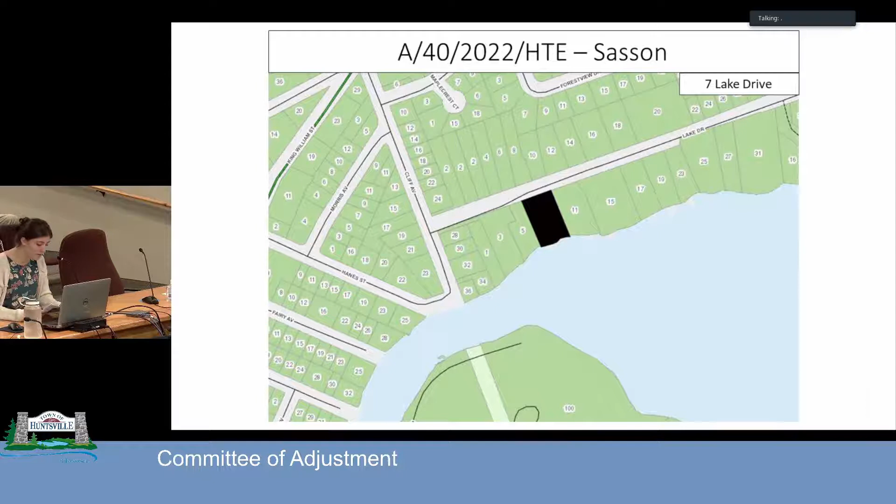Through you, Mr. Chair, the subject property is located at 7 Lake Drive. The lot is designated urban shoreline residential within the Huntsville settlement area in Huntsville's official plan and zoned residential 1 under Huntsville zoning. It should be noted that the Town of Huntsville's community planning permit bylaw was passed by council in July 2022, but is currently under appeal and not yet in full force and effect.

The subject lands are contained within the urban residential shoreline precinct in the CPP bylaw. The application is to permit the reconstruction of the existing dwelling and to expand an attached deck on the lot. The dwelling proposed to be reconstructed and expanded is considered a legal non-complying structure. The dwelling was constructed in 1976 with various alterations completed up until 2007, which included the construction of the deck, now proposed to be expanded.

The minor variance is required to recognize the location of the existing dwelling and attached deck, permit a 3-meter increase in height for a legal non-complying dwelling, and reduce the front yard setback from 30 meters to 13 meters for a deck addition and additional building height. The minor variance will be conditional on the owner revegetating the shoreline buffer, and this will be implemented through site plan control or a community planning permit to the satisfaction of the Town of Huntsville.

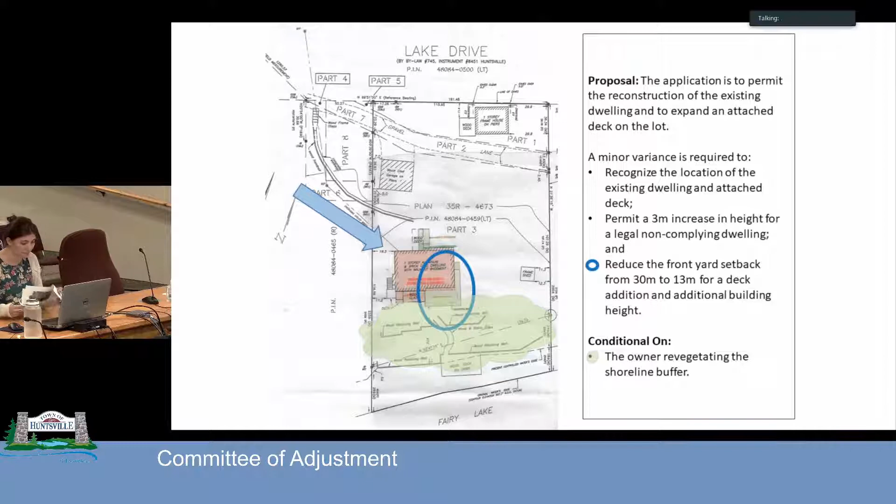Based on the configuration of the property, the proposed reconstruction of the dwelling and deck expansion is sited in the most suitable location. The proposal uses the existing foundation and remains within the maximum height requirement to add an additional story. The deck expansion uses the existing front yard setback and does not come closer to the shoreline.

The variance requested will not likely result in any significant impact to abutting landowners. Additionally, a condition has been added to revegetate along the shoreline, which will assist in providing additional vegetation and minimize the visual impact of the dwelling.

Having regard to the provisions in the community planning permit bylaw, this proposal would be in keeping with the identified precinct and policies contained in the CPP, provided revegetation of the shoreline is completed to the satisfaction of the town as a condition of the permit issuance.

Looking at the official plan, the proposed reconstruction has been designed to meet the character of the area by maintaining the existing location and staying within the maximum height. The reconstructed dwelling will be built on the existing foundation, and the deck expansion will not worsen the non-compliance, as the reconstructed dwelling will not be coming closer to the shoreline and will involve revegetating the shoreline.

Any impacts to water quality will be mitigated and a net improvement is gained. The reconstruction and expansion is also to be located in a clear, flat area, so adverse impacts on steep slopes and blasting will be avoided.

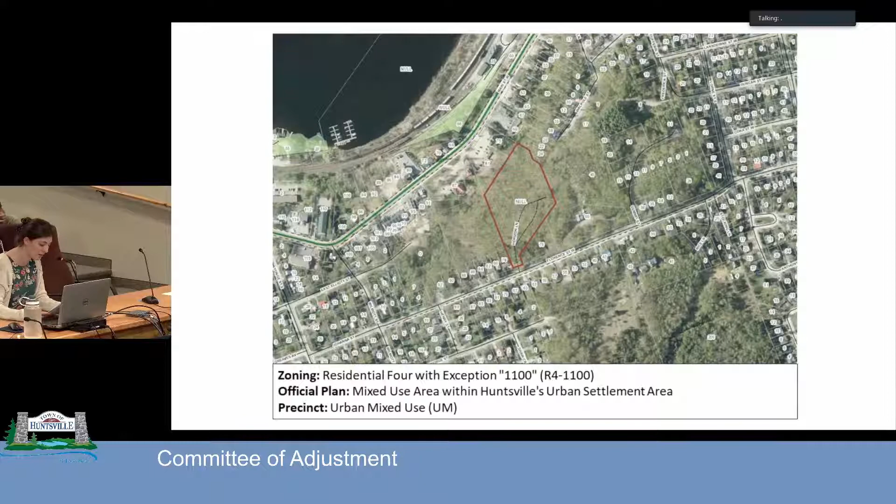The subject lands are contained within the urban mixed-use precinct in the CPP bylaw. The application is to permit the construction of a detached 2-story garage with 2 attached carports on the lot. A minor variance is required to reduce the easterly interior side yard setback from 6 meters to 3.2 meters for a 79-meter square 2-story building consisting of a ground-story garage with residential dwelling unit above, and reduce the easterly interior side yard setback from 6 meters to 3.8 meters for 2 144-meter square carport structures only. The minor variance is conditional on maintaining a 2-meter wide vegetative buffer along the easterly side lot lines to be implemented through site plan control or community planning permit to the satisfaction of the Town of Huntsville.

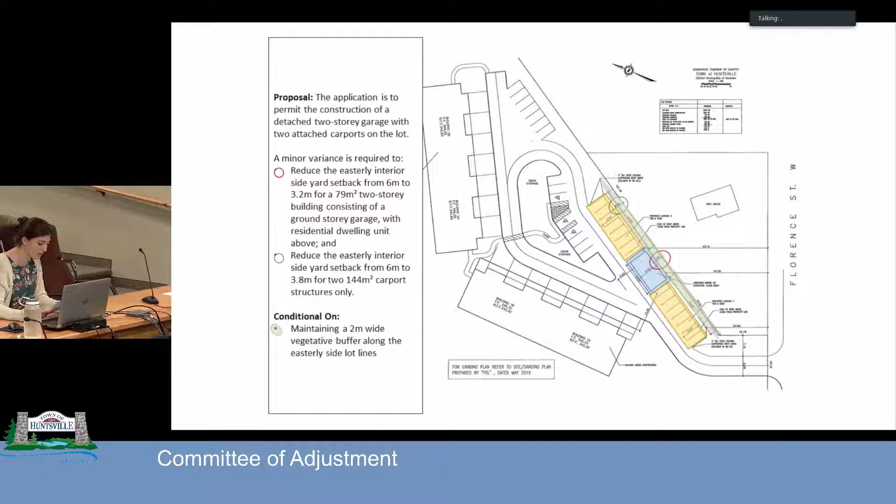On June 25th, 2001, a site plan agreement was approved to permit a townhouse development on the subject lands consisting of 16 2-story townhouse dwelling units with basement secondary residential dwelling units in each. A site plan agreement amendment application will be required should this application be viewed favorably by committee. The proposed use is in keeping with the site-specific permissions, and the development appears to generally meet all of the relevant provisions of the zoning bylaw. With the residential unit on the 2nd story of the garage, the site will contain 33 units overall and accommodate sheltered parking for all units.

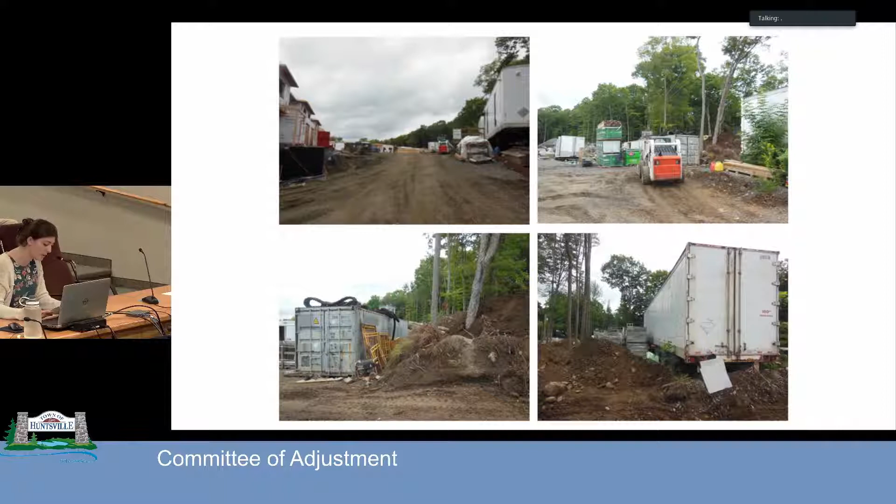The proposal is sited in the most suitable location, given the location of the entrance to the site and the current site layout. Additionally, maintaining a 2-meter wide vegetative buffer along the easterly interior side yard has been added as a condition to provide additional screening. If the CPP bylaw was in effect, a Class 3 permit would be required to authorize this development, as the proposed setback variation for the two-story garage is greater than 20%. Having regard to the CPP bylaw, the recommendations outlined in this report are in keeping with the identified precinct and policies contained within the CPP.

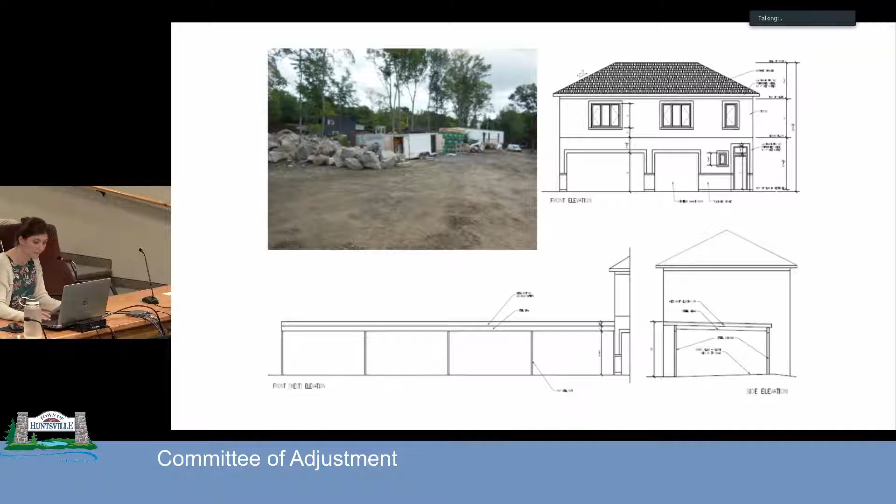Looking at the official plan, the mixed-use area designation encourages development that will contribute to the well-being and cohesiveness of the community in a compact form. In this instance, the proposed garage and carport structures contribute to the functionality of the development on the lot while being compact and cohesive with the existing site characteristics. The application was circulated in accordance with the provisions of the Planning Act, and the application would appear to conform to the intent of the official plan and be consistent with the provincial policy statement. Additionally, the application appears to satisfy the 4 tests for a minor variance as set out in the Planning Act, and therefore staff are recommending approval. Thank you for listening, and I'd be happy to answer any questions.

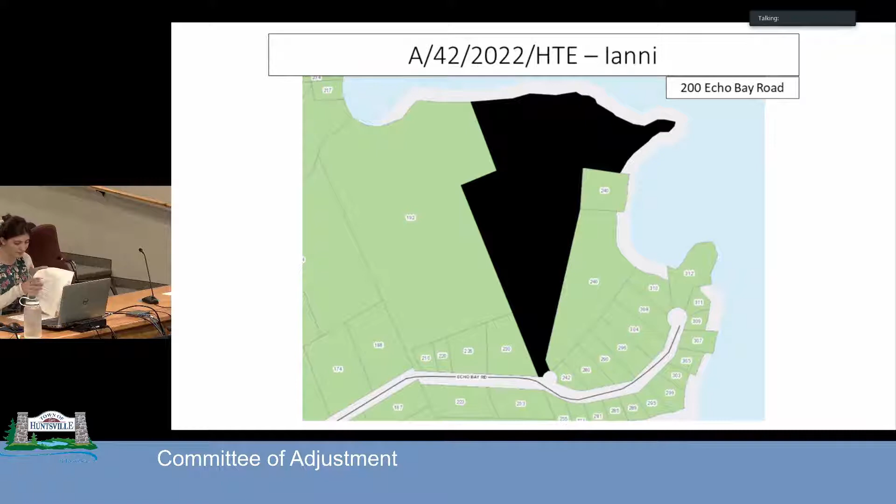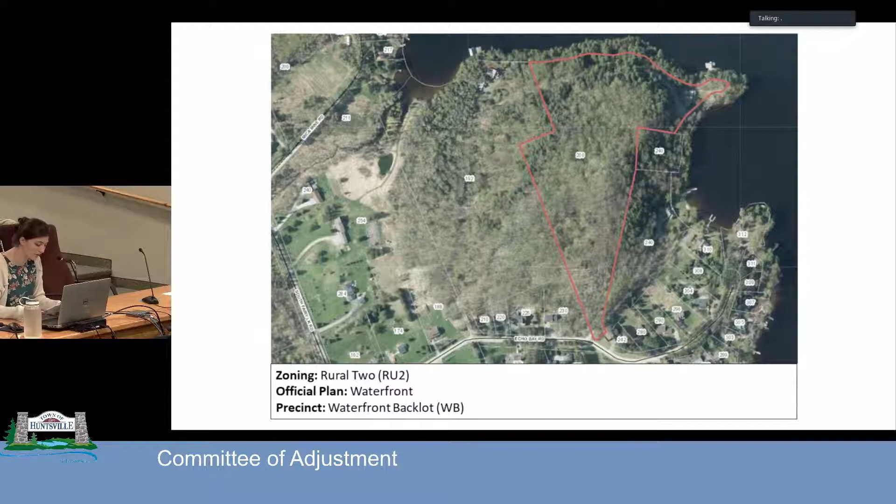The lot is designated waterfront in Huntsville's official plan and zoned rural 2 under Huntsville zoning bylaw. The subject lands are contained within the waterfront backlot precinct in the community planning permit bylaw. An application has been submitted to permit the construction of a single detached residential dwelling with an attached garage on the lot. A minor variance is required to reduce the front yard setback from 30 meters to 18 meters,

reduce the setback from type 1 fish habitat from 30 meters to 18 meters both for a single detached dwelling, and recognize the location of an existing dryland boathouse within 13 meters of the shoreline and closer to the shoreline than the principal dwelling.

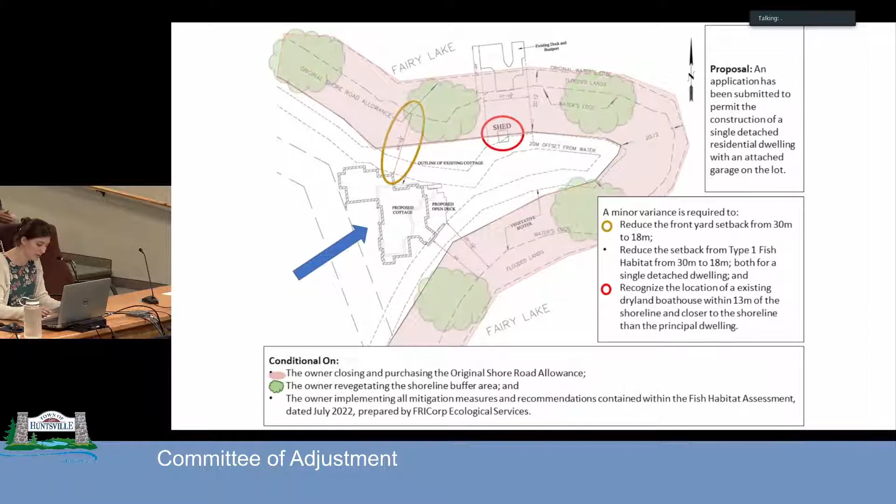The minor variance will be conditional on the owner closing and purchasing the original shore road allowance, the owner revegetating the shoreline buffer, and the owner implementing all mitigation measures and recommendations contained within the fish habitat assessment dated July 2022, prepared by FRICorp Ecological Services, all to be implemented through site plan control or community planning permit to the satisfaction of the town of Huntsville.

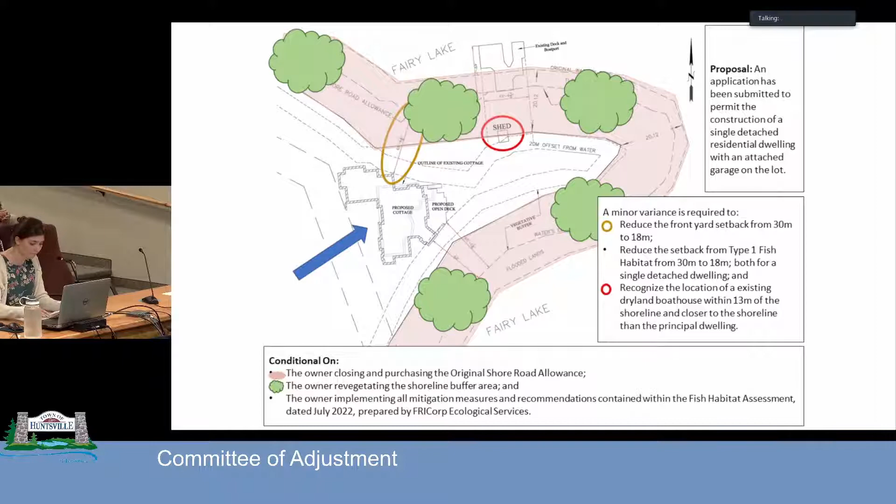In this instance, due to the large lot size, mature vegetation, and development siting, the proposal does not dominate the physical landscape and will reflect that of the surrounding area. A Class 2 permit would be required to authorize the proposal, and a technical report, as was submitted in this instance, would be necessary. Having regard to the provisions of the CPP bylaw, staff would recommend approval of the variance in this instance if the CPP bylaw was in effect.

Looking at the official plan, the waterfront designation anticipates linear, low-density shoreline residential development that respects the character and natural setting of the waterfront area. The proposal is in keeping with the character of the waterfront area, as the proposed dwelling is sited outside of steep slope areas, and recommendations have been provided by FRICorp Ecological Services to ensure that there are no negative impacts to water quality resulting from the development.

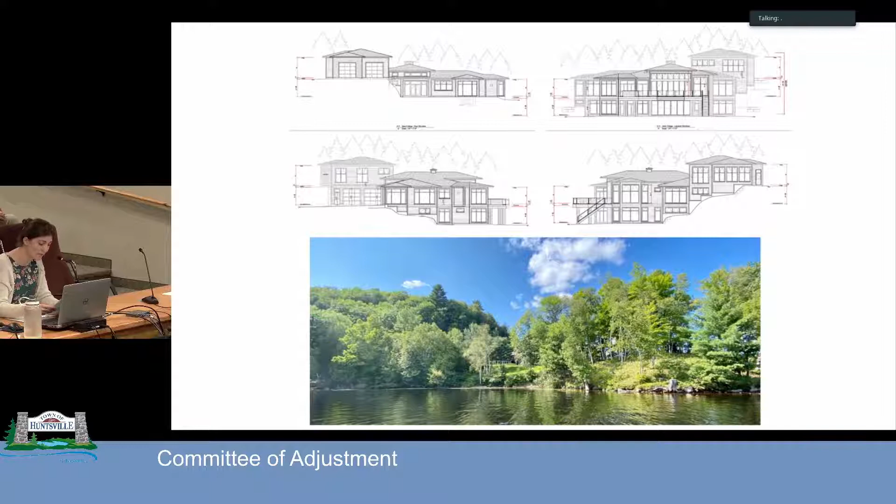The reduced setback for the proposed dwelling to the shoreline and to Type 1 fish habitat will be mitigated largely by the mature vegetation along the shoreline. Conditions have been recommended to require implementation of all mitigation measures and recommendations outlined in the report, and to implement a revegetation plan to enhance areas along the shoreline with additional vegetation. A revegetation plan was prepared by FRICorp Ecological Services.

The application was circulated in accordance with the provisions of the Planning Act and to the Fairy Lake Association. 2 letters of support were received by neighboring property owners. The application would appear to conform to the intent of the official plan and be consistent with the provincial policy statement. Additionally, the application appears to satisfy the 4 tests for a minor variance as set out in the Planning Act, and therefore staff are recommending approval. Thank you for listening, and I'm happy to answer any questions.

Thanks very much. Call on the applicant or representative to make any comments. And he's on his way.

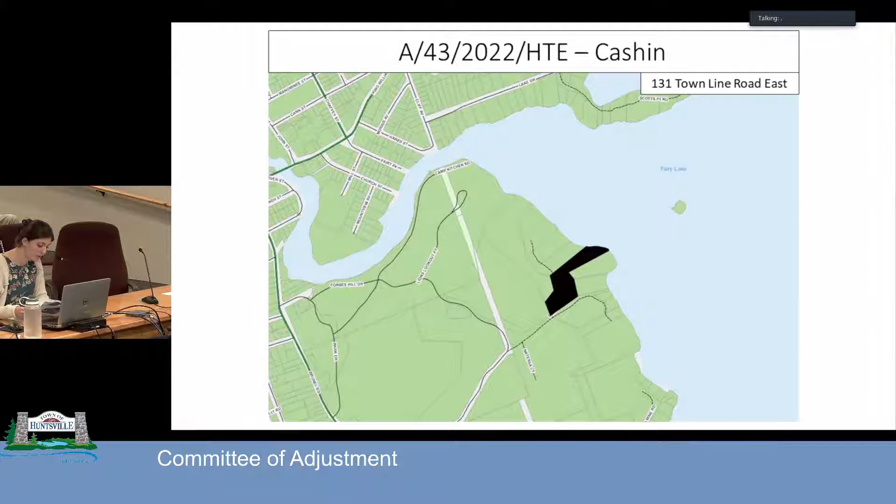The lot is designated waterfront in Huntsville's official plan and zoned Shoreline Residential 4 under Huntsville's zoning bylaw. The subject lands are contained within the waterfront residential 120 meters precinct in the community planning permit.

The application is to permit the construction of an addition to the existing dwelling and a new boathouse on the lot. A minor variance is required to reduce the required setback to Type 1 fish habitat from 30 meters to 0 meters to permit the construction of a boathouse, reduce the westerly interior side yard setback from 6 meters to 2.8 meters for an addition to the dwelling, and increase the primary lot coverage as calculated on the portion of the lot within 90 meters of the shoreline from 5% to 7.01%.

The minor variance is conditional on the owner removing the existing shed and landing within the 15-meter shoreline buffer, the owner removing the existing floating dock, the owner removing the existing shipping container structure on the property or obtaining a building permit to permit it to stay, the owner removing one of the paths through the shoreline buffer.

The owner revegetating the shoreline buffer in the area of the shed, path, and stairway that are to be removed, and the owner maintaining the existing treed vegetation along the westerly interior side yard, and the owner implementing all mitigation measures outlined in the fish habitat assessment dated August 4th, 2022, prepared by FRICorp Ecological Services, all to be implemented through site plan control or a community planning permit to the satisfaction of the town of Huntsville.

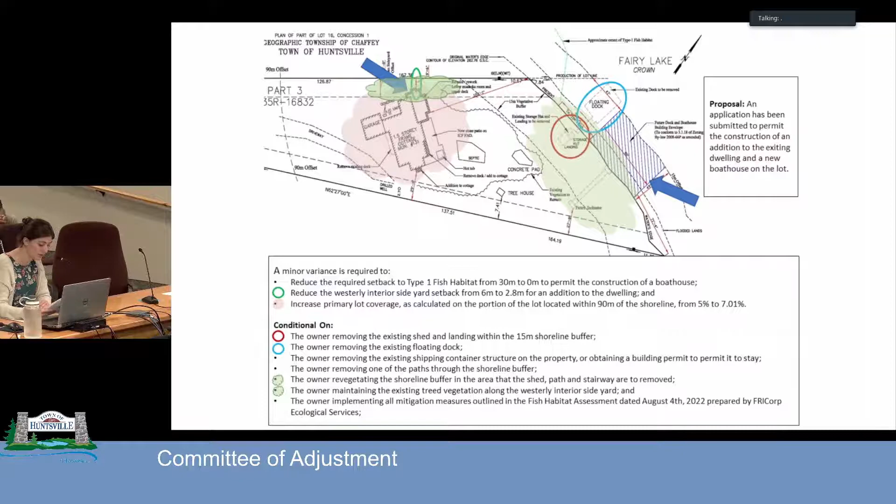The proposed addition to the dwelling is sited in the most suitable location as it utilizes the current location of an existing deck. The proposed addition is slightly larger than the original deck and includes enclosing the bottom portion under the deck. The current dwelling is legal non-complying.

The proposed addition allows for an improvement by reducing primary lot coverage from the current 7.46% to 7.01% within 90 meters of the shoreline. The reduction in the interior side yard setback will be decreasing from the current 4.8 meters to 2.8 meters.

To maintain visual screening, a condition has been added to maintain the existing vegetation along the westerly side yard. In terms of the shoreline, the existing dock, shed, and landing will be removed, and a condition has been added to address this. To ensure the shoreline buffer is kept in a natural state outside of the amenity areas, a condition is recommended to require disturbed areas to be revegetated.

Currently, there are 2 paths to the shoreline. A condition has also been recommended to eliminate one of the paths. It was noticed that a shipping container is placed at the entrance of the property without benefit of a site plan or building permits. A condition is recommended to require that structure to be removed or that a building permit be obtained to permit it to stay.

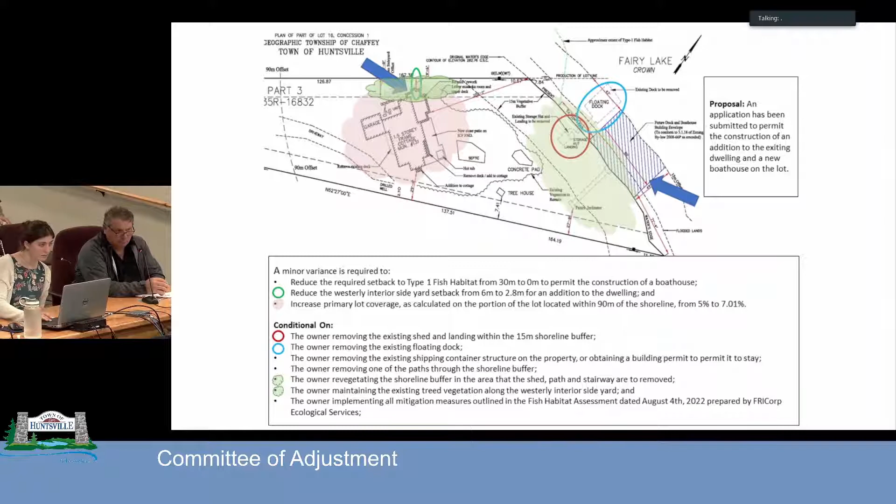Jeff, would you be comfortable commenting? That will all be removed - we're going to get rid of the wood steps and do actual stone steps instead, to make it look more natural, leading to the boathouse. There'll be a demo permit for that when we start the boathouse.

Right, okay, quite the project. I do have a question, and I don't know who it's for, but we're increasing the lot coverage from 5 to 7.01%. Is it not appropriate we reduce the accessory structure amount as well?

So we did consider that with this application. However, with the proposed size of the future boathouse, and there's a treehouse on the lot as well, the accessory structures are at 5%. So that would be the only two accessory structures on the property after all said and done?

If the shipping container is removed - yeah, which will be removed - yeah, so those will be the only two accessory structures. All right, that's great, I can live with that.

Any other comments or questions? All right, moved by Kenneth Donald, seconded by Helena Renwick.

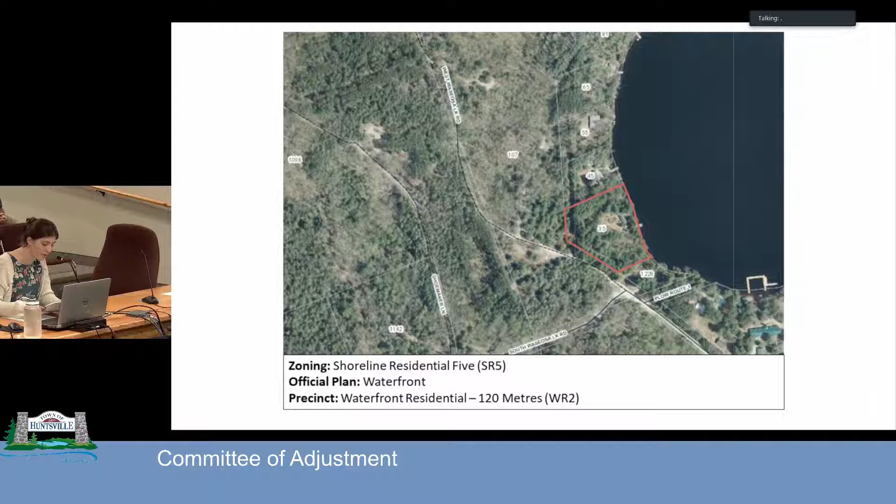35 West Wasiosa, Madeline. Thank you, Mr. Chair. Through you, the subject property is located at 35 West Wasiosa Lake Road. The lot is designated waterfront in Huntsville's Official Plan and zoned Shoreline Residential 5 under Huntsville Zoning Bylaw. The subject lands are contained within the Waterfront Residential 120 Meters Precinct in the Community Planning Permit Bylaw.

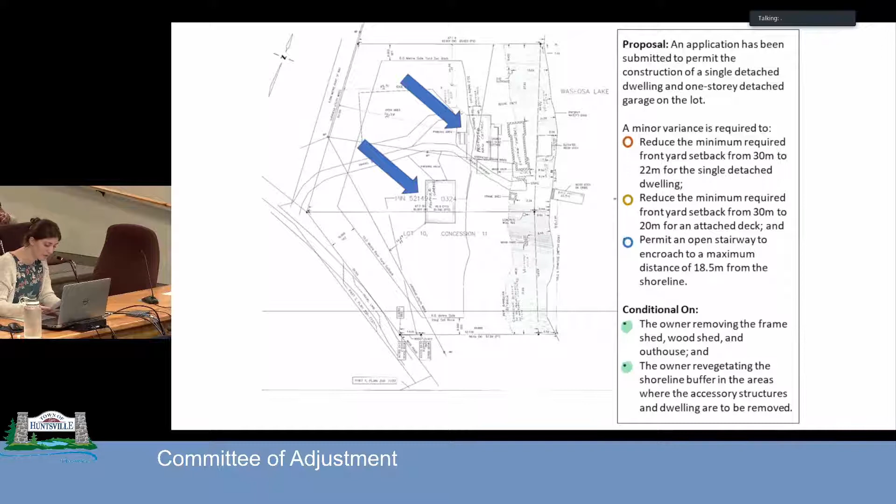An application has been submitted to permit the construction of a single detached dwelling and one-story detached garage on the lot. A minor variance is required to reduce the minimum required front yard setback from 30 meters to 22 meters for a single detached dwelling, reduce the minimum required front yard setback from 30 meters to 20 meters for an attached deck, and permit an open stairway to encroach to a maximum distance of 18.5 meters from the shoreline.

The minor variance will be conditional on the owner removing the frame shed, wood shed, and outhouse, the owner revegetating the shoreline buffer in the areas where the accessory structures and dwelling are to be removed, and both are to be implemented through site plan control or community planning permit to the satisfaction of the town.

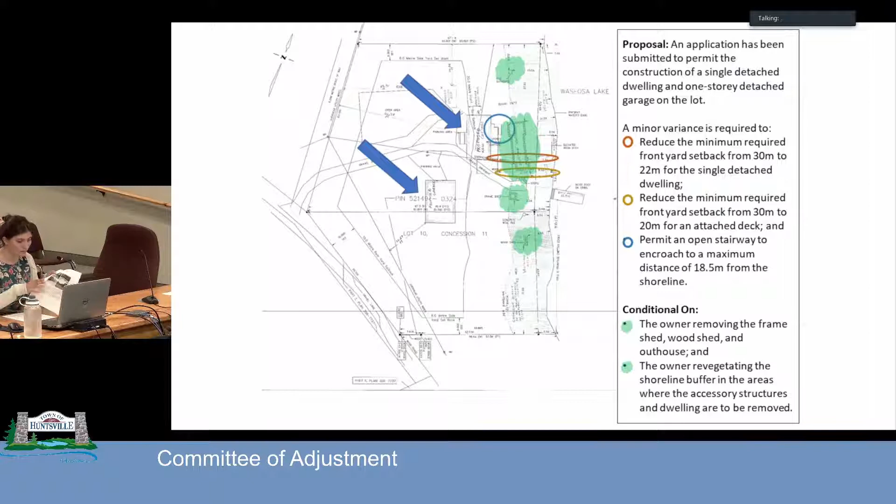The proposed dwelling is sited in the most suitable location as it moves further from the shoreline and will be located on flat ground. The size and scale of the proposed dwelling will reflect that of the surrounding area and be visually screened by the vegetation along the shoreline. As such, the variance requested will not likely result in any significant impacts to abutting landowners.

To ensure the shoreline buffer is kept in a natural state outside of the amenity areas, conditions have been added to require the owner to remove the existing structures and to revegetate in the area where the accessory structures and dwelling are to be removed.

In this case, having regard to the provisions of the CPP bylaw, a Class 2 permit would be required to authorize the proposed variation from this requirement. Staff would recommend approval of the proposed variation if the CPP bylaw was in effect.

Looking at the official plan, the subject lands are included in the waterfront designation. Guidelines in this designation promote development of buildings that are sited in the most appropriate areas on the lot, limited in terms of massing and coverage in relation to the size and frontage of the property, and designed in keeping with the character of the surrounding area.

The proposed dwelling and attached deck respect the character of the waterfront area and has not proposed to overdevelop the lot by staying within the height and lot coverage restrictions.

Natural constraint mapping identifies type 2 fish habitat as well as Lake Wasiosa being a cold water lake containing lake trout habitat. The proposal will mitigate effects to type 2 fish habitat as the dwelling will move further from the shoreline, creating a larger buffer for vegetation and stormwater runoff, as well as including additional vegetation.

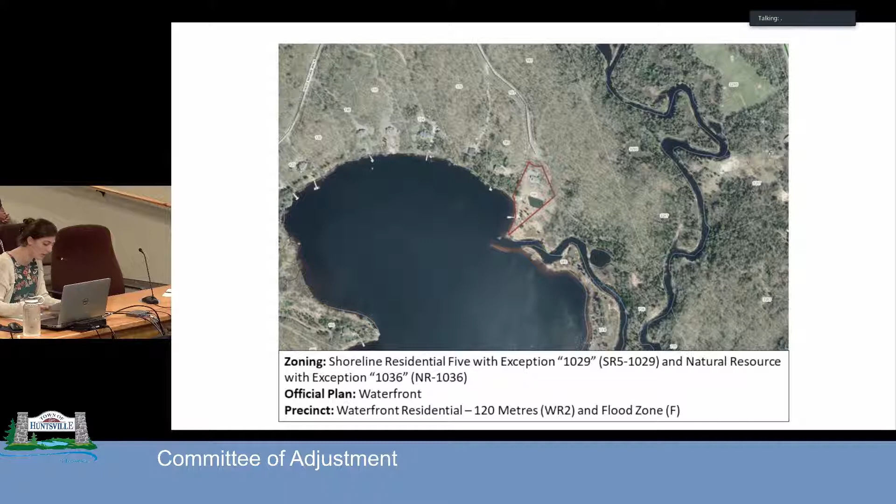An application has been submitted to recognize an existing dryland boathouse and to permit an existing boardwalk pathway and wood deck within the natural resource zone.

In 2001, a site plan application was submitted for the construction of a 1-story detached garage on the lot. Through the review process, it was determined that a dryland boathouse, a boardwalk pathway to the shoreline, and a wood deck were all constructed in non-complying locations by a previous owner and were not lawfully established.

A minor variance is required to recognize an existing 7.9 square meter dryland boathouse located closer to the shoreline than the principal dwelling on the lot, and to permit an existing 71 square meter boardwalk pathway and 30 square meter wood deck within a natural resource zone.

The minor variance will be conditional on the owner removing a 2.9 square meter frame shed, to be implemented through site plan control or community planning permit to the satisfaction of the Town of Huntsville.

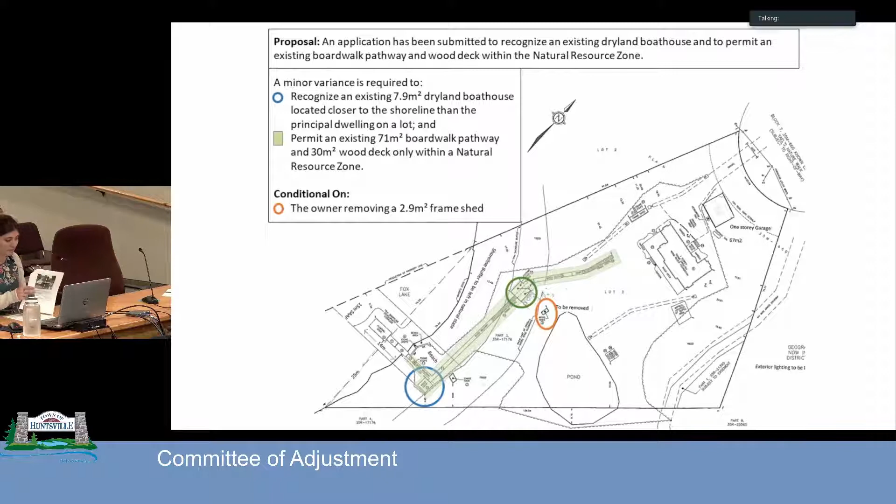Site-specific zoning on the property established the maximum lot coverage for accessory buildings at 2.5% and the minimum yard requirement from a watercourse as 30 meters, as well as stating that a maximum of 1 dock is permitted. Development is generally prohibited within the natural resource zone, except for flood or erosion control facilities, parks, and non-complying structures.

As this area is prone to flooding, the boardwalk pathway allows for access down to the shoreline while not disrupting the areas and vegetation around it. The boardwalk, wood deck, and dryland boathouse do not dominate the natural resource zone and increase the functionality of the space. The dryland boathouse has been constructed on top of a wood deck, maintaining similar construction to the boardwalk and dock, being low impact and avoiding aggravation in flooding conditions.

On shoreline properties, a maximum of 3 roofed accessory structures are permitted. To ensure compliance with this requirement, the frame shed beside the wood deck along the boardwalk pathway is proposed to be removed to allow for the detached garage, and a condition has been added to ensure this.

In this case, having regard to the provisions of the CPP bylaw, a Class 2 permit approval would be required to authorize the proposed variation from this requirement. Staff would recommend approval of the proposed variation if the CPP bylaw was in effect.

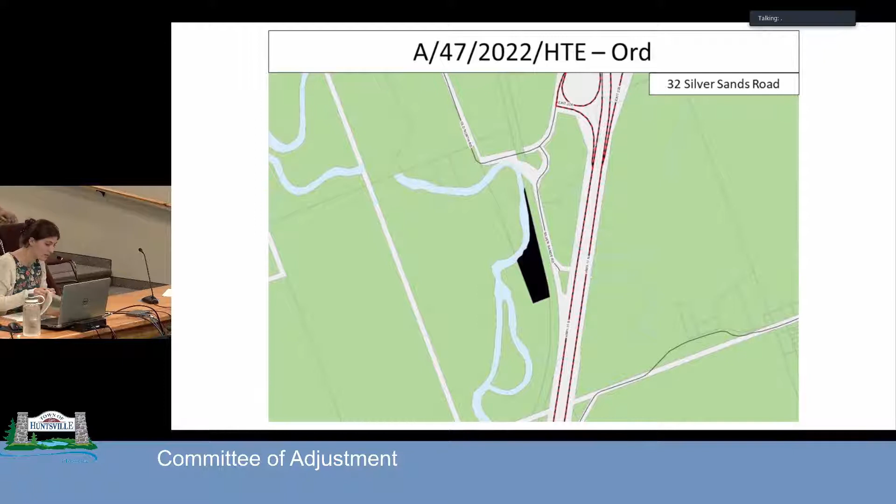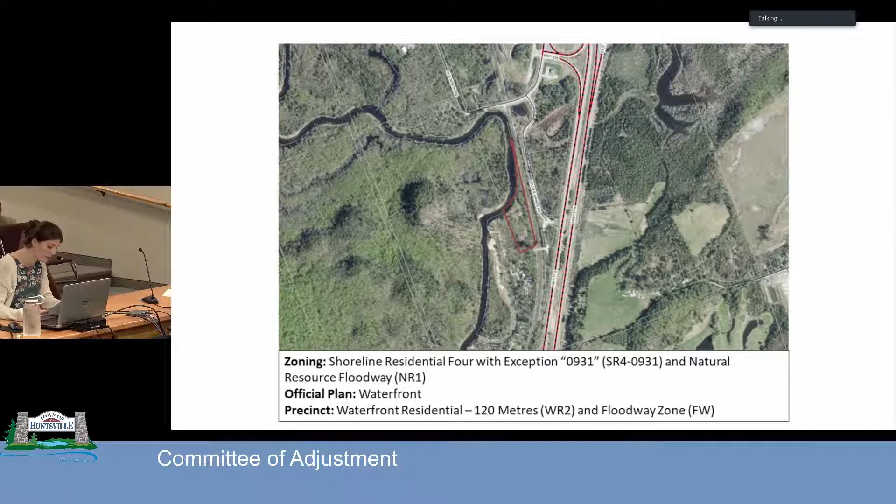The lot is designated waterfront in Huntsville's official plan and zoned Shoreline Residential 4 with exception 931 and Natural Resource Floodway under Huntsville zoning bylaw. The subject lands are contained within the waterfront residential 120 meters and floodway zone precincts in the community planning permit bylaw.

An application has been submitted to permit the construction of a utility shed on the lot. A minor variance is required to permit a 20-meter squared utility shed to be located below the regulatory flood elevation.

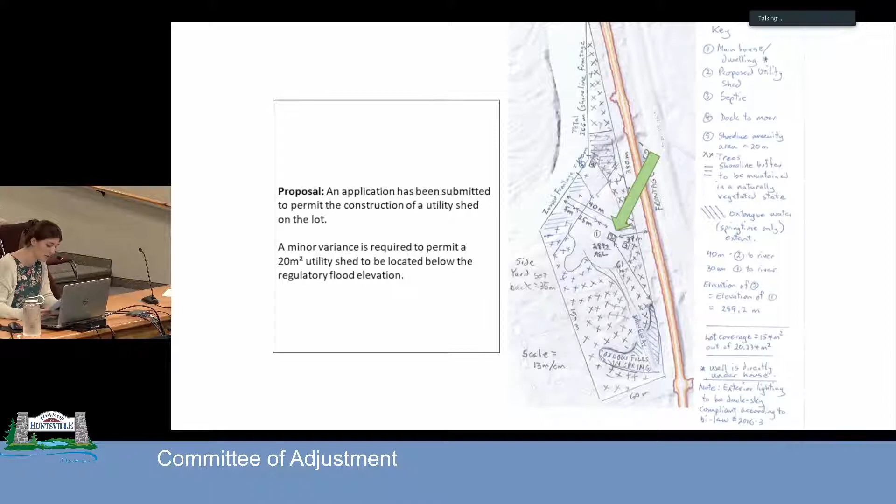Site-specific zoning on the property states that the minimum elevation for openings to buildings and structures shall be above 290 meters above sea level, and the minimum elevation for the driveway shall be 289.16 meters above sea level, with a minimum setback from the watercourse of 30 meters.

The Shoreline Residential 4 zone permits the development of single detached dwellings and accessory structures. The single detached dwelling has been built on a portion of the property zoned Shoreline Residential 4. The proposed utility shed is located within the Shoreline Residential 4 zoned portion of the property, in close proximity to the dwelling. However, the elevation of the proposed utility shed is unknown.

A Class 3 permit approval would be required to authorize a variation from the requirements of this proposal. Having regard to the provisions of the community planning permit bylaw, staff would recommend that council deny the proposed variation in this instance if the CPP bylaw was in effect.

Looking at the official plan, the subject lands are included in the waterfront designation. In this instance, the proposal will result in minimal visual impacts from the river, as it will be hidden by existing vegetation and elevation changes. The utility shed reflects the size and scale of the lot. An existing dwelling, however, is keeping with the character of the area.

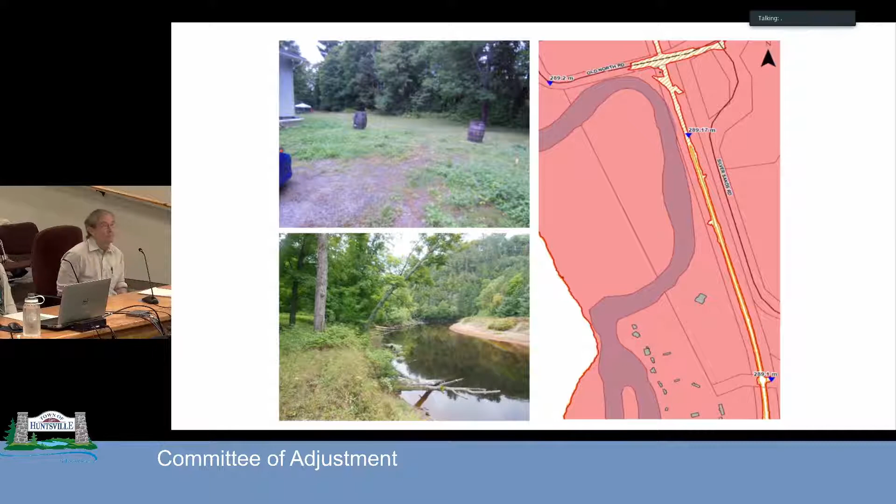Thank you very much. Members of the public, do you have any questions about this application? Chair Stone, I see no hands raised. All right, committee members, comments or questions?

Mr. Donald: Thank you, Chair Stone. Question through you to Madeline. On the floodplain map for the Big East River that was illustrated there, in the legend on the attachments you sent through, it says floodway and then floodline.

Could you help me understand the difference between those two elements? For sure, through you, Mr. Chair. So flood line, or flood fringe, you could see as sort of diagonal lines in light orange, and floodway is essentially the pinkish red portion overlaid. So is the flood line the railroad? Is that part of CN, as identified on the map? That would be where the CN tracks are, yeah. Okay, yeah.

Go ahead, thank you, and a second question. So to the applicant's point, I always struggle with anything happening in the Big East. But we are talking about half a meter below the permitted elevation, is that correct? Where the shed is going to be, if that ground was half a meter higher, we wouldn't be having this conversation, is that correct?

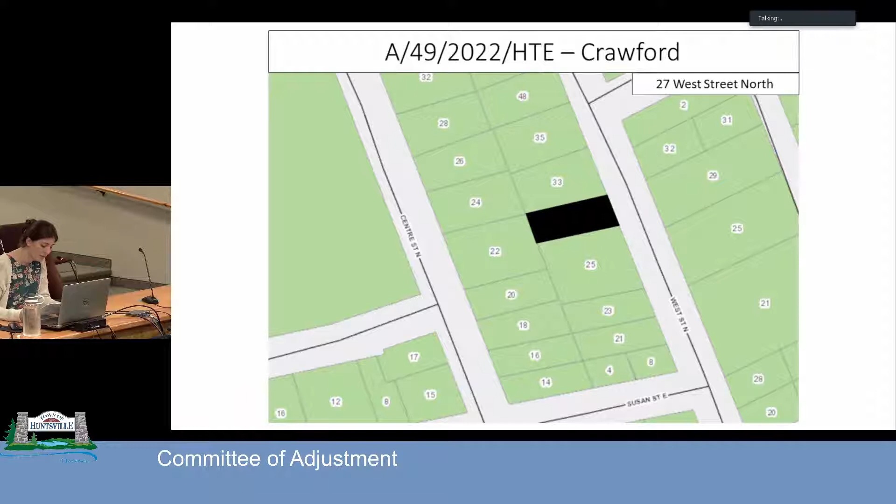The lot is designated residential within the Huntsville settlement area in Huntsville's official plan and zoned Residential 1 under Huntsville's zoning bylaw. The subject lands are contained within the urban residential low precinct in the community planning permit. The application is to permit the reconstruction and expansion of a portion of the dwelling. On June 15th, 2022, a minor variance was approved for the subject property, file number A23-2022, which recognized an existing 1.2 meter setback from the northerly interior lot line and permitted a reduction from 1.5 meters to 1.2 meters in the northerly interior side yard setback for an addition to a single-family dwelling.

Due to a survey error, the relief required for the reconstruction of the dwelling is a reduction to the northerly side yard from 1.5 meters to 0.8 meters. A minor variance is required to recognize the location of the existing dwelling within 0.8 meters of the northerly interior side lot line and permit a reduction in the northerly interior side yard setback from 1.5 meters to 0.8 meters for a 4.5 meter high, 43 square meter addition to a single detached dwelling. The minor variance will be conditional on maintaining a treed vegetative buffer along the northerly interior side yard.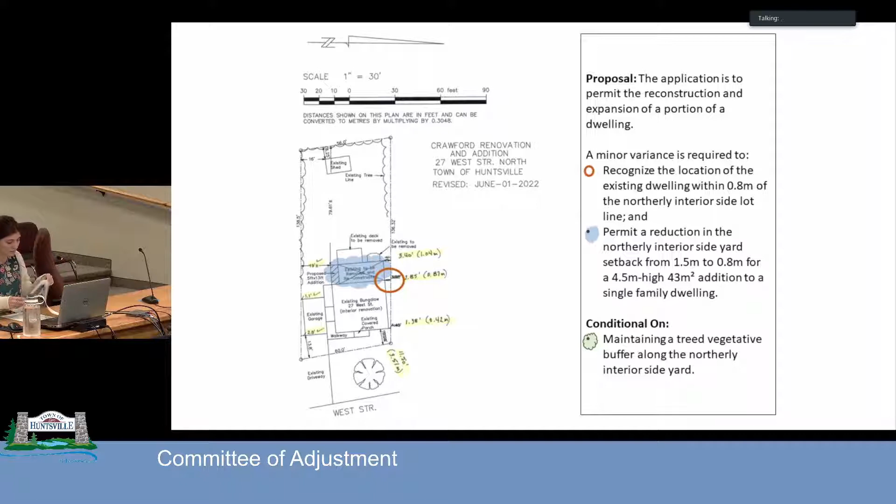Based on the configuration of the property, the proposed reconstruction and expansion is located in the most suitable location. The proposal complies with lot coverage and maintains the existing non-complying yard requirements along both side yards and the front yard. The increase in height for the reconstruction and expansion is also below the maximum permitted height for an R1 zone property. The reconstruction and expansion proposal will not likely result in any significant new impacts to abutting landowners. Additionally, maintaining a vegetative buffer along the northerly side yard adjacent to the proposed structure has been added as a condition to provide screening. Class 3 permit approval would be required to authorize a variation from the minimum required side yard setback for this proposal.

Having regard to the provisions of the CPP bylaw, staff would recommend that council approve the proposed variation to the urban residential low precinct lot requirements in this instance if CPP was in effect.

Looking at the official plan, the residential designation within the urban center encourages intensification through the built-up area by requiring development to be in a compact form. In this instance, the proposal is in keeping with the current use of the property as is intended to improve the function of the dwelling while maintaining the character of the surrounding area.

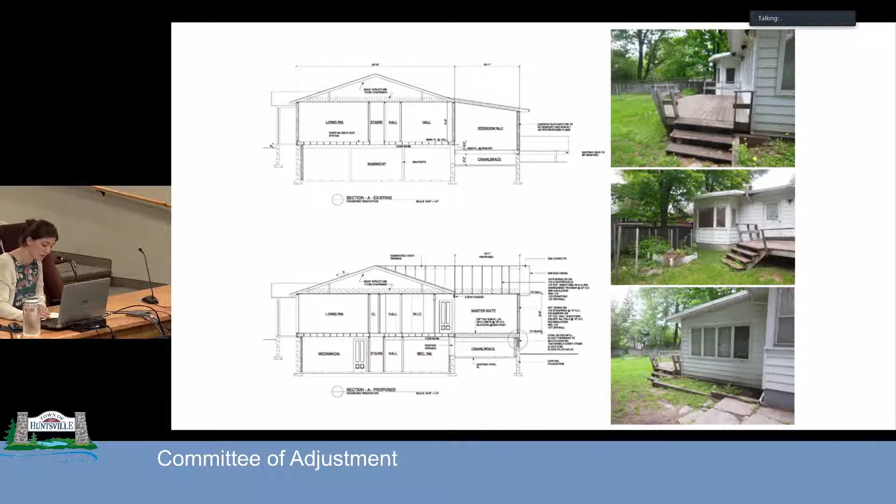The existing deck and a portion of the existing dwelling are to be removed. The proposed 0.8 meter northerly interior side yard encroachment is not changing with this proposal, but is being recognized as the height in the area is increasing. Additionally, the design of the reconstruction and expansion is in keeping with the character of the existing structure and surrounding built form.

The application was circulated in accordance with the provisions of the Planning Act. The application would appear to conform to the intent of the official plan and be consistent with the provincial policy statement. Additionally, the application appears to satisfy the four tests for a minor variance as set out in the Planning Act, and therefore staff are recommending approval. Thank you for listening, and I'd be happy to answer any questions.

Thanks very much. I'll call on the applicant or representative to make any comments, perhaps online - raise your hand electronically. Chair Stone, I see no hands raised. All right, members of the public that wish to speak to this application? I see no hands raised, Chair Stone. Seeing none, committee members, comments or questions?

All right, moved by Helena Renwick, seconded by Councillor Fitzgerald.

Be it resolved that minor variance application A49 2022 HTE be approved. The purpose and effect of which is to provide relief from subsections 3.13.2 and 5.2.4 of the Comprehensive Zoning Bylaw 2008-66P, in order to recognize the location of the existing dwelling within 0.8 meters of the northerly interior side lot line, and permit a reduction in the northerly interior side yard setback from 1.5 meters to 0.8 meters for a 4.5 meter high, 43 square meter addition to a single family dwelling, conditional on maintaining a treed vegetative buffer along the northerly interior side yard.

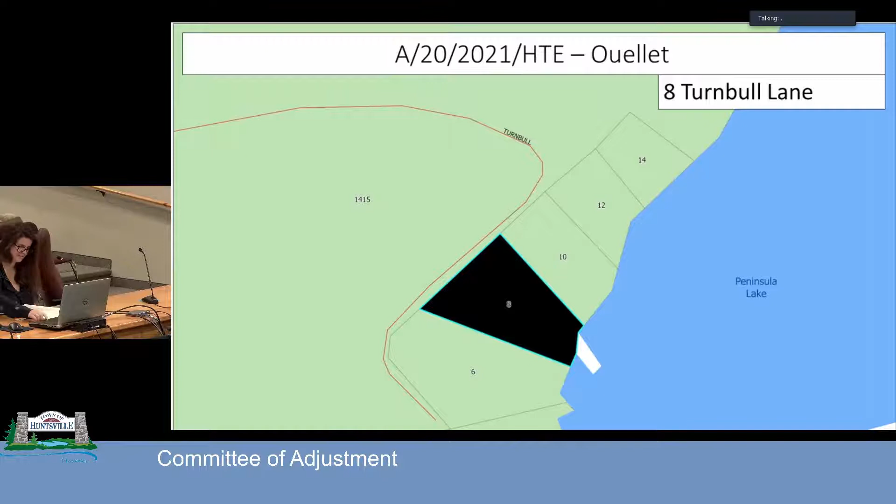Great, thank you. Good morning, everyone. Through you, Mr. Chair, the subject property is located at 8 Turnbull Lane. The lot is designated waterfront and is zoned Shoreline Residential 3.

The subject lands are also contained within the Recreational Resort Residential designation in the CPP bylaw, which applies to residential properties within the Hidden Valley Resort Residential area. As discussed in previous presentations, the Community Planning Permit bylaw was passed in July by Council. However, it's not yet in force and effect. However, the future precinct is important to note.

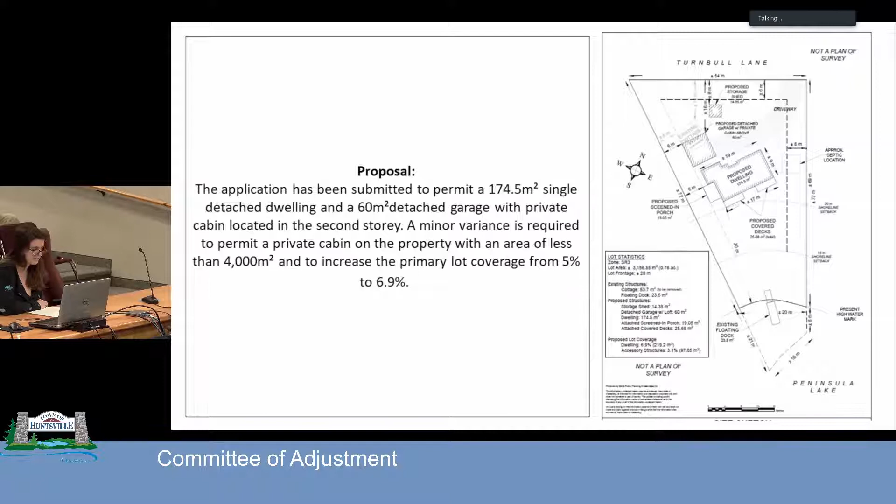The application has been submitted to permit a 174.5 square meter single detached dwelling and a 60 square meter detached garage, with a private cabin located on the second story of the garage. So here's the dwelling and the detached garage, and the private cabin will be on the second floor. A minor variance is required to permit a private cabin on a property with an area of less than 4,000 square meters, which is an acre, and to increase the primary lot coverage from 5% to 6.9%.

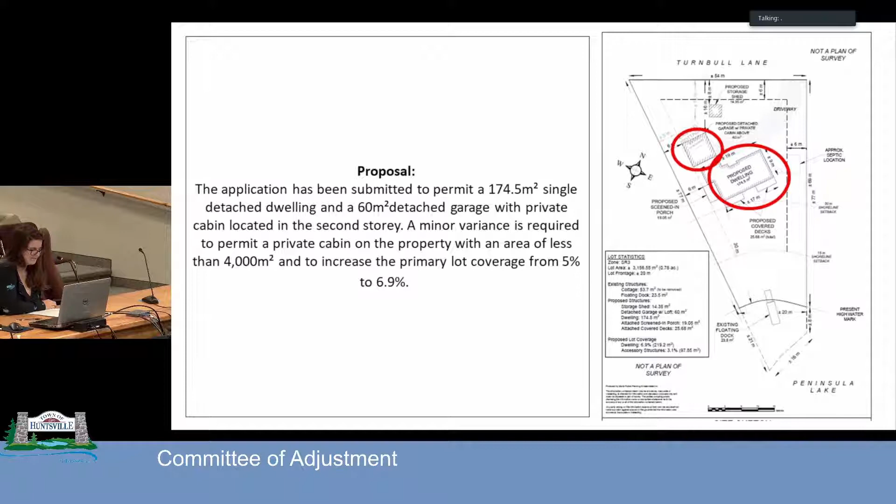Flood-prone lands are identified on the property. The official plan states that new development and site alteration, except for minor expansions to existing legal non-conforming uses, flood and erosion control measure structures, and marine-related structures such as docks, decks, and non-habitable boathouses, are not permitted below the regulatory flood elevation. Staff requested a geodetic survey to establish the accurate flood elevations on the property, which we did receive. The survey showed that the majority of the lands are below the regulatory flood elevation for Peninsula Lake. Therefore, the proposed dwelling and detached garage with the private cabin would be developed within the floodplain.

It is noted that the applicant has a design where doors, windows, and other openings in the habitable buildings and structures are to be above the minimum regulatory flood elevation. However, the official plan does not permit new development within the floodplain, to prevent loss of life and property damage. The proposal would also not be considered a minor addition to the legal non-conforming use, as the proposed dwelling is over triple the size of the existing dwelling.

Based on this analysis of the town's flood hazard policies, the development would not be in keeping with the intent of the official plan. Also, given the application does not conform to the official plan, the proposal would be considered under a Class 3 permit under the Community Planning Permit, and approval would not be recommended by staff.

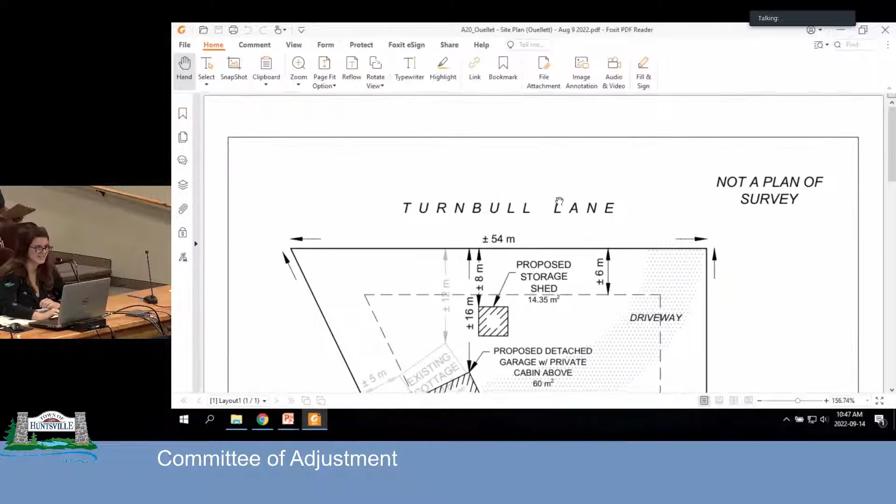So I now just have it on my screen, apologies. There's been a couple of iterations, so I'll just zoom out so you could get a better view. So as the proposal sits right now, there is a detached garage, which is 60 square meters, and the proposed dwelling, which is 174.5 square meters, and then a utility shed. That's not what's in our package. Oh, apologies. All right, so what's on the screen here is what is proposed. Is that correct? Yes, that is correct.

And if I can be clear, so the existing cottage would be demolished? Yes, that is correct. And if I might, is habitable space allowed above the garage? That's part of the relief, would be permitting a private cabin above in the second story on a lot under 4,000 square meters. All right, thank you.

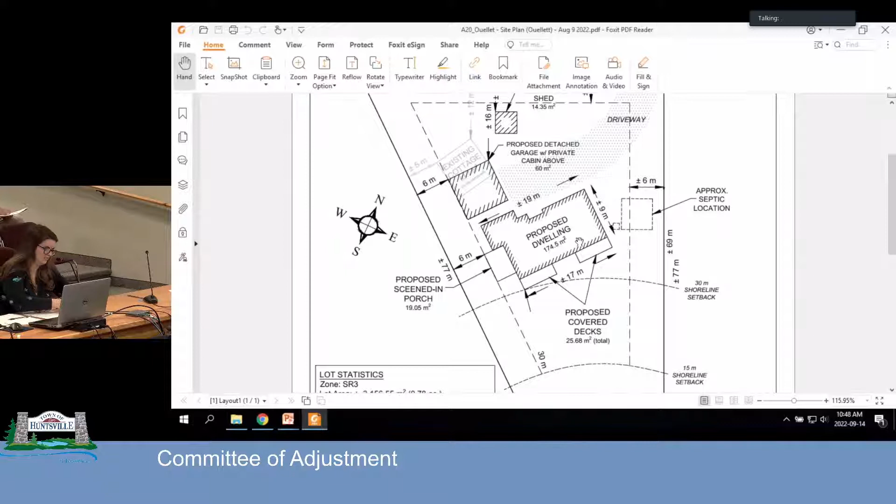Mr. Donald. Is it appropriate to ask the applicant a question at this point? Sure, if the applicant can come down. All right, Mr. Donald, your question?

I apologize, Mr. Ouellet. The document that we had in our package differs from the one that's presented on the screen at the moment. To your neighbour's comment, and for your consideration, the detached garage, was it detached because of trying to meet the planning requirement, or was it something that you desired? No, the detached garage was... Can you put your microphone on, please? My proposal was to have the garage attached to the house, but because of the planning department, it resulted in detaching the garage.

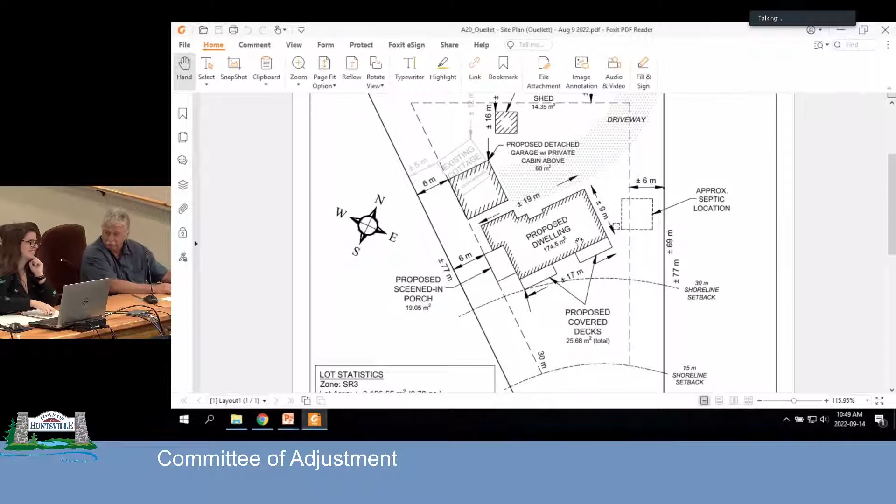All right, that doesn't... Okay, Kelsey, can you speak to that, please? Yes, sorry. So we have talked about this application for the past year. There were many different iterations, and I think they were trying to achieve meeting the 5% and 5%. So that's why detaching the garage was suggested. And then in this iteration, they went with that plan. So it wasn't, we didn't tell them, but we said maybe if you were to try to meet the provisions, that might be an option. But this proposal still doesn't meet the primary lot coverage of 5%.

All right, so just to be clear, if our committee chooses to extend the primary lot coverage, we could then put the garage attached to the dwelling. Is that correct? Yes, so we would just have to revise the relief. I just have to do a quick calculation and get confirmation from the owner about what that calculation would be to change the relief to have an attached garage, if that's what you wish to do.

All right, thank you. I'll ask Mr. Clark to speak. So just to add to what Kelsey's already said, the other thing we might want to check with is the engineer, just because the garage would have doors at grade level, so it would be a potential point for water to enter the building. So I would imagine there would be a flood-proofing question. They might be able to easily address it, or it might be complex. So I would just throw that on the table if we could get Mr. Duke here with us. If Mr. Duke could come back, if he's still attached electronically. I'm working on bringing him in.

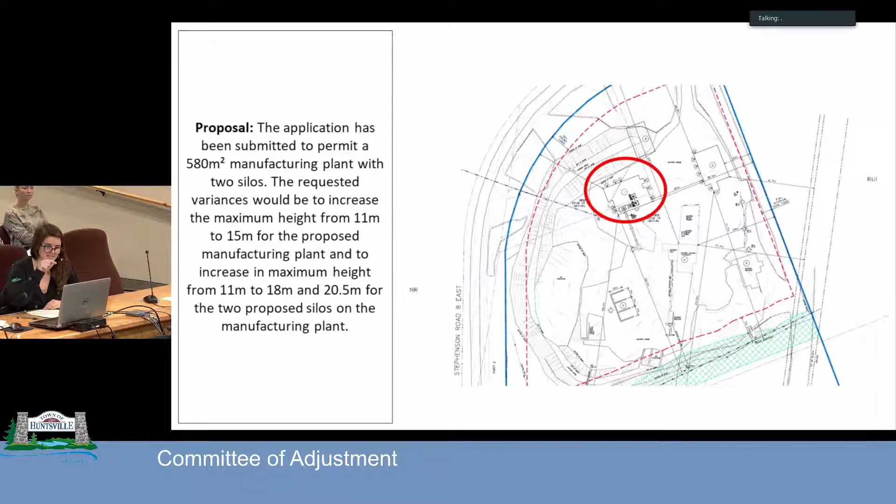Resource industries will only be permitted to expand in a manner that mitigates negative impacts to the natural environment and land use conflicts with surrounding land uses, in accordance with provincial requirements.

A scoped environmental impact assessment was prepared by Riverstone to assess the proposed development and potential impacts to the stream and wetland on the property. The author confirmed the stream is a warm water stream and discussed existing impacts from the batching operation. A remediation plan of a 20-meter buffer between the stream and development is recommended, and a condition has been added to ensure the remediation is carried out and enforced through a site plan or community planning permit, should the minor variance be approved.

The proposed concrete batch plant is in an existing cleared area, 100 meters from Highway 11, making the existing plant visible from the highway. Existing native vegetation helps screen much of the development from view. The proposed new batch plant is equally visible, purely out of necessity for the function of the plant, but will be clad in natural hues.

The existing plant's silo is also 22 meters. No additional trees will be removed from the site, and a 20-meter buffer from the watercourse will be revegetated as outlined in the Riverstone report. Therefore, there will be no further visual impacts.

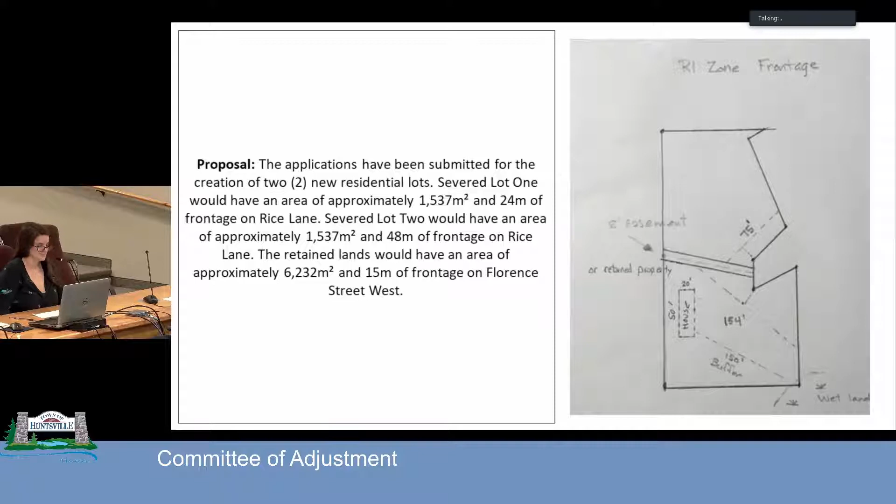Staff have requested a scoped environmental impact study to delineate the unevaluated wetland and provide appropriate setbacks for development, including the future development on the proposed lots and a road turnaround. A study has not been provided, and the applicant has decided to proceed with the application. Without accurate delineation of the wetland, staff were unable to determine if development would have negative impacts on the wetland, and if there will be appropriate and adequate building areas on each of the proposed lots.

Additionally, it has not been determined that a turning circle can be constructed to service the proposed lots without resulting in negative impacts. Staff cannot support the consent applications without the required study, as there is no information about the wetland and the potential adverse effects.

The application has been circulated in accordance with the provisions of the Planning Act. District planning staff provided comments and did not oppose the approval of the application. The operations department provided comments and noted that with a new entrance there's no room for snow storage related to the municipal operations, as Rice Lane is only 10 meters in width.

Following the planning committee, there was a meeting with operations on site to discuss the requirements in this regard and potential locations for the turnaround, snow storage, and entrances. The operations department noted that the proposed turnaround would also be in proximity to the unevaluated wetland, and a study would be needed to determine appropriate setback.

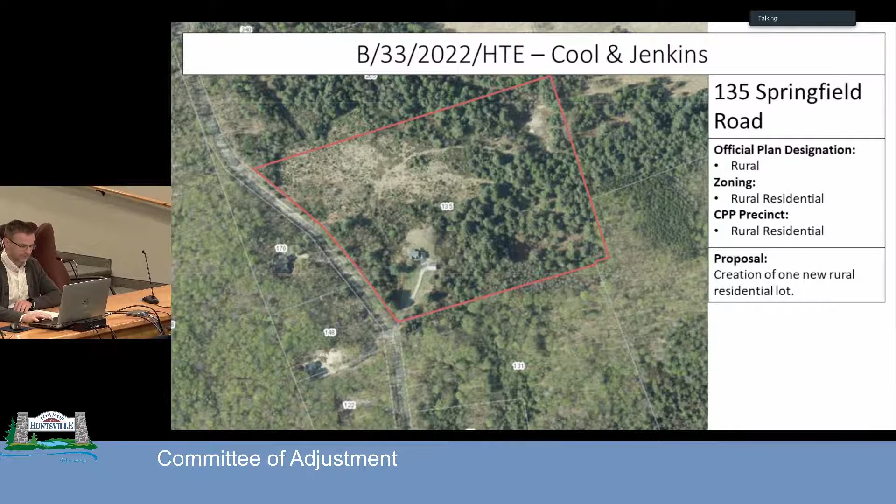The application before you is a consent application to create 1 new rural residential lot that's approximately 2 hectares in area with 134 meters of frontage on Springfield Road. The retained lot would have an area of approximately 5.8 hectares and 132 meters of frontage on Springfield Road.

The official plan contains policies that require new lots within the rural area to be sized to appropriately accommodate their use. In this instance, the lot is used as a rural residential lot. Minimum lot requirements for rural residential lots include lots that are a minimum of 2 hectares in area and 134 meters of frontage. In consideration of these requirements, the proposed new lot conforms with respect to area and frontage, but results in a slightly undersized retained lot with respect to frontage at 132 meters, whereas 134 meters is required.

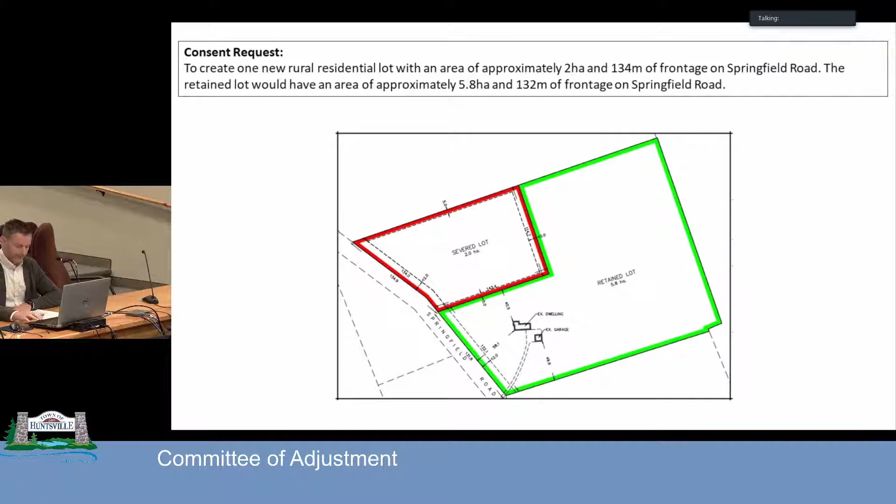The number of rural residential lots permitted to be created in the rural area are also addressed in the official plan policies. These policies are to be applied in the rural area, notwithstanding the minimum lot requirements just noted. And they cap the number of new rural residential lots that may be severed from an existing lot as existed in June 2006 at 3. Given that the proposed new lot represents the 5th such lot to be severed, the proposed development would exceed the 3-lot cap for rural residential lot severances from a 2006 existing lot.

For this committee's convenience, the 2006 existing lot is shown in a green boundary and highlighted in white, and applications to sever land from it occurred in 2009 to the north, 2019 to the south, and there were 3 lots created through those 2019 applications. So this one would represent a fifth lot.

The subject lands are identified as being within the Fairy Lake Wave Cut Notch Muskoka Heritage Area. According to the Natural Heritage evaluation of Muskoka, completed as part of Muskoka's Heritage Area program, this heritage area was established to protect a distinctive landform defined as a wave-cut notch and foreshore platform of historic Lake Algonquin, which was a glacial lake that existed approximately 12,000 years ago. Apparently this feature is unique Muskoka-wide, and that's why it's considered a special place.

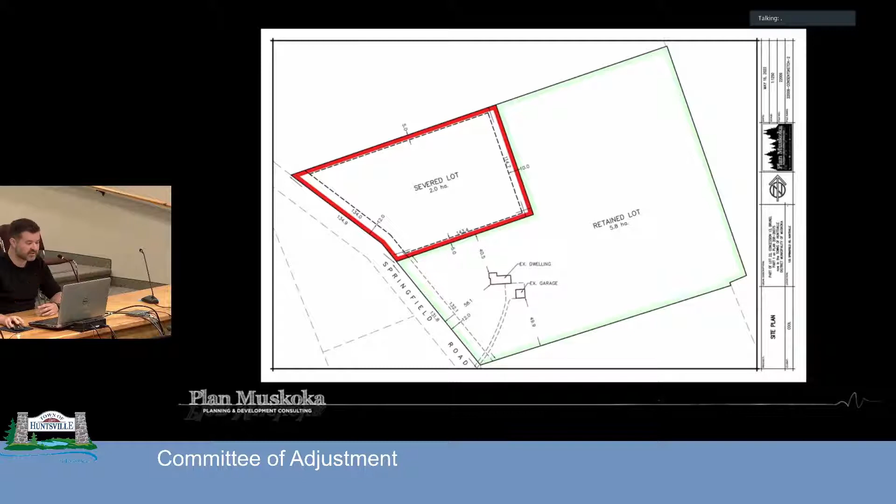So staff has raised 4 concerns with this application. That's the need for a wildland fire risk assessment that hasn't been provided, a need for an updated site evaluation report with respect to the Muskoka Heritage Area that has been mentioned, a frontage deficiency for the retained lands, and that it exceeds the number of rural residential lots permitted on the land since June of 2006, as outlined in the official plan.

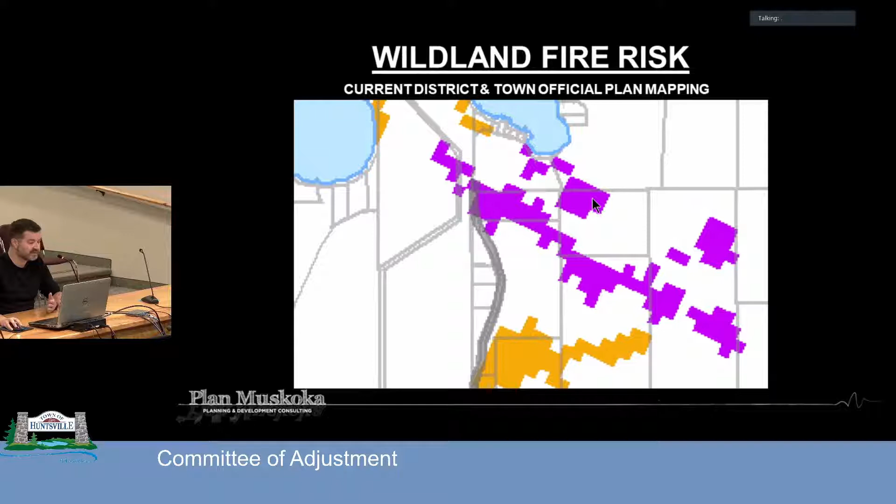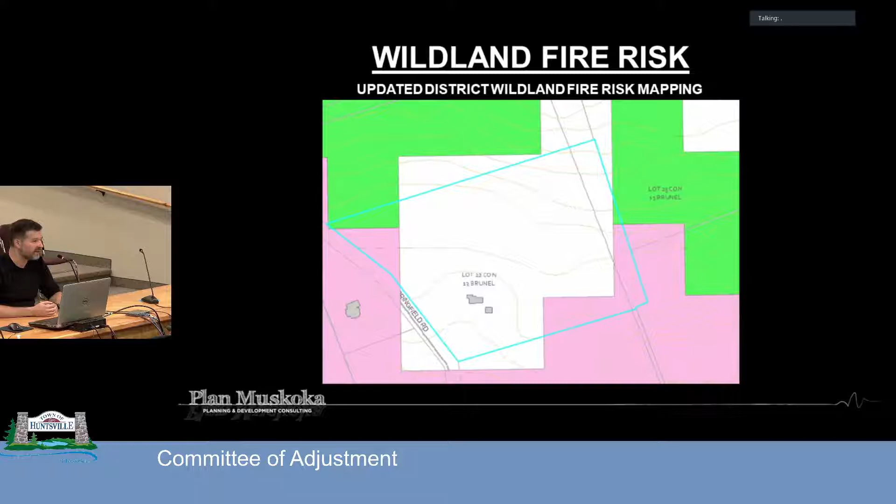Given, looking at the property, I know there are some pine areas through here, and there's a driveway that comes down this property. I feel like it's outside of that area, and it's close enough that it just sort of bleeds in a little bit. There's obviously areas outside of these risk areas that can be constructed upon. I feel like the study of this case, particularly because it's been done for the previous consent applications that created this lot, might be a little bit overkill to require another study for this application, given the updated mapping.

The second thing is the Muskoka Heritage Area. As Richard mentioned, it's called the Fairy Lake Wave Cut Notch Muskoka Heritage Area. I want to read you the description, because this is different from anything I've come across before. It's described as a small geological site approximately 500 meters east of Timber Bay on Fairy Lake, at an elevation of 335 meters above sea level. The feature consists of a 4 to 5 meter tall bluff with a foreshore platform approximately 100 meters wide, consisting of 1 meter of fine nearshore sand overlaying glacial till. The northern edge of the platform is bounded by a steep bedrock-controlled descent of about 50 meters to the shore of Fairy Lake.

The significance of this landform is that it's distinct and relatively unusual in Muskoka. It's not like a typical natural heritage feature such as a wetland or a stream that we can quantify. It's simply a landform that's unique and doesn't occur in Muskoka very often. We don't know exactly where it is, but we know it's generally in this area.

As Richard mentioned, there was a study prepared when this property was created that looked for this feature and did not find it on this property. But there's some confusion as to what parts of the property they were looking at when they prepared that study. They were looking at the severed lots that were proposed, and those severed lots were south of these lands because these were the retained lots. So it looks like they may have skipped over where this proposed lot is being created and looked at the remainder of the property instead. So they didn't find it then.